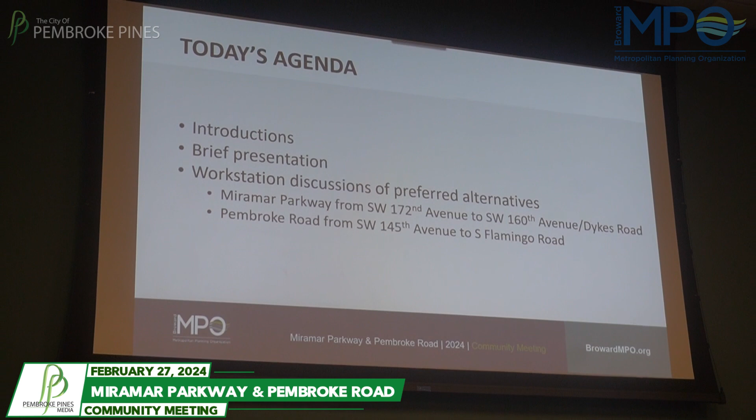Could you wait till Commissioner Castillo is coming in right now? Oh, it's coming right now? Okay. All right, are they here? Yes. Okay. Don't know if a representative from Pembroke Pines or Miramar would like to come up and say a few words if you'd like. If not, that would be great too. Or, this is your show. Let the healing begin. Okay, sounds good.

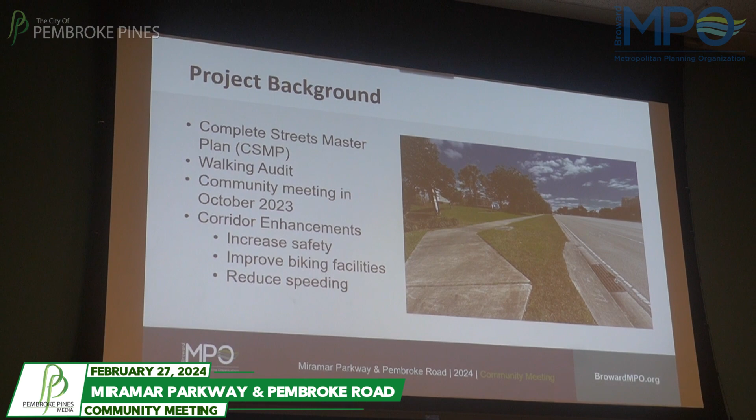A bit of background about the project. It really came from the Complete Streets Master Plan that the Broward MPO put together about 4 or 5 years ago. This project became a priority within that plan. We had a walking audit in 2023 where our project team, including many of you, walked the entire length of both corridors, gathered a lot of data and other information.

We had a meeting back in October. We got a lot of good feedback. With that feedback, we heard a few priorities from the public. We heard you wanted a safe, protected, separate bike lane on Miramar Parkway and Pembroke Road. You definitely wanted that to be a priority. We heard you, and tried to include that in the modified alternative you have before you today. Overall, you wanted both corridors to be safer, operate better, have slower traffic, and we tried to provide that as well.

I'm going to hand it off to Stuart. He'll take you through the details of both projects. Thank you, Mark. So my name is Stuart, I'm with Kimley Horn and Associates. We're the consultant team supporting the Broward MPO, as well as the cities of Pembroke Pines and Miramar on this project, which comes from the Complete Streets Master Plan that the MPO Governing Board adopted in 2019.

So there are 2 corridors packaged together as part of this project for funding through the Complete Streets Master Plan, which is a priority of the Broward MPO's Metropolitan Transportation Plan. As we have 2 corridors, I'm going to go through the Miramar Parkway corridor first. It's shown on the right side as you're looking at me. If you're in the audience, look on your right side, Miramar Parkway. That's the boards and the map that you see on your right.

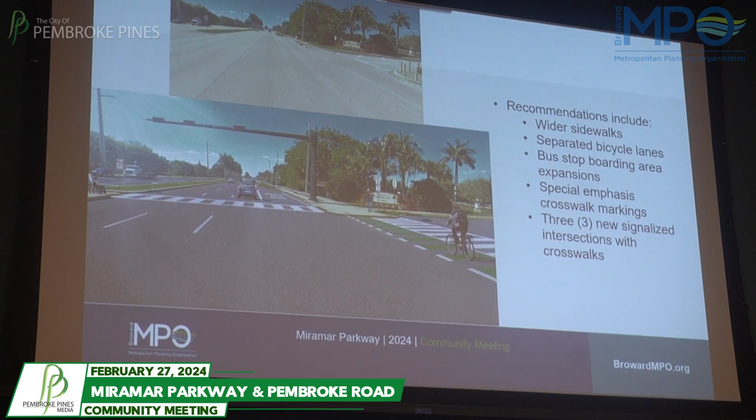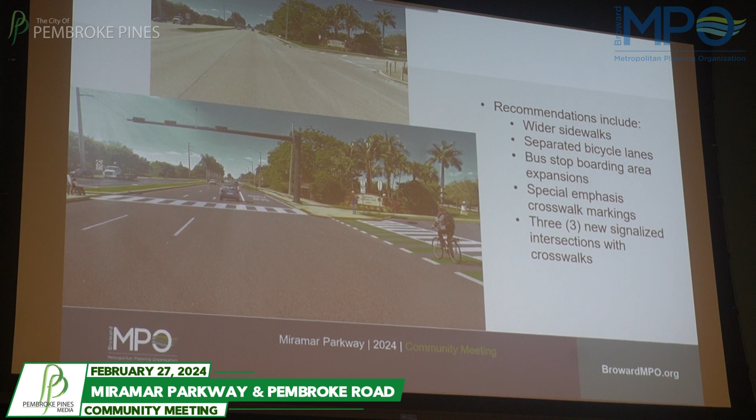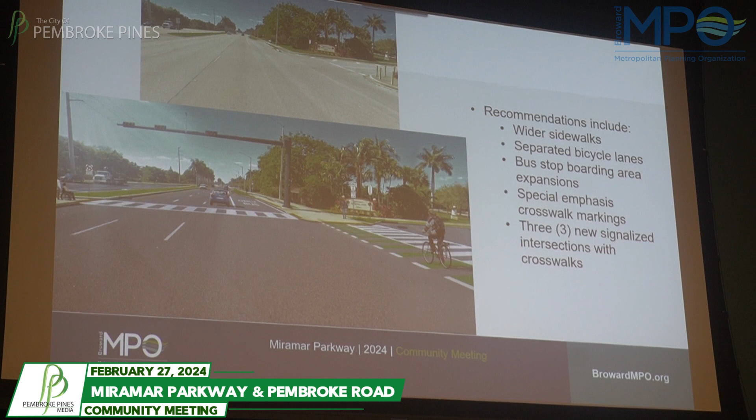The recommendations we've made, based on our field assessment, our technical analysis, and the community input we received back in October when we had a public meeting just like this at Miramar Police Department, include implementing wider sidewalks on Miramar Parkway, and separated bicycle lanes, taking the bicycle lanes we have, which are currently on road, and moving them up on the curb, basically separated from roadway traffic, adjacent to pedestrians on the sidewalk. We're also recommending bus stop boarding area expansions so we have more room for accommodating bus passengers boarding and alighting from the bus stops. We're recommending special emphasis crosswalks at all signalized intersections and 3 new signalized intersections with special emphasis crosswalks along the corridor.

The renderings on the left of this slide: the image on top shows an existing photo of the intersection of Miramar Parkway and the Miramar Regional Park. The image on the bottom portrays what it would be in the future, with a traffic signal added, bicycle lanes protected from traffic, and crosswalks at this location.

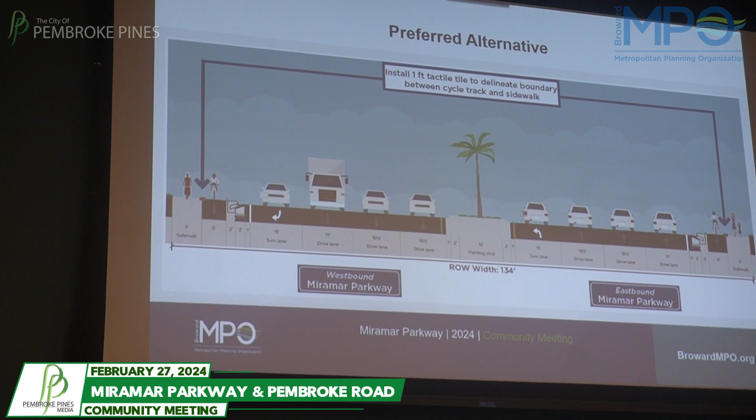So on the boards we have around the room for Miramar Parkway, that's going to be on your right as you're in the audience looking at me. We have different sections that show you the proposed design for each of the corridors.

For Miramar Parkway, we are proposing to maintain all of the existing travel lanes. There's 3 lanes in each direction today, and there will be 3 lanes in each direction in the future. The bicycle lane is being moved to be on the curb, adjacent to the sidewalk, rather than adjacent to the roadway like it is today.

In order to accomplish this, we're proposing to reconstruct the drainage of the roadway. So the curbs will have to move inward so that we can accommodate the bicycle lane adjacent to the sidewalk rather than adjacent to the roadway.

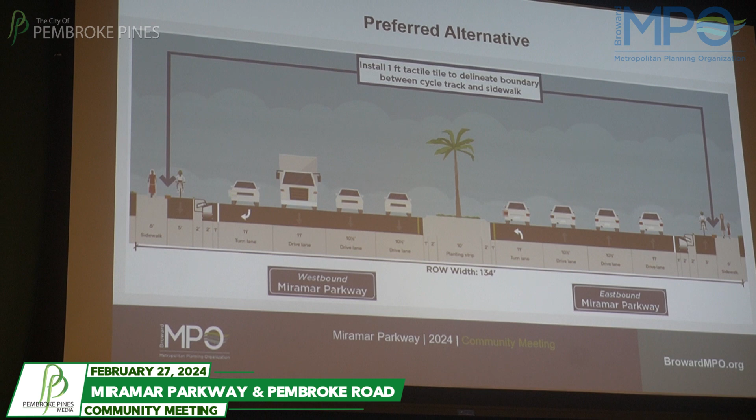We also have a map that shows how this would look from an aerial photograph. That's the long map on the table to your right. It shows an entire design from 172nd Avenue in the west all the way to Dykes Road, or 160th Avenue, in the east. It also shows the locations of the new signals we're proposing.

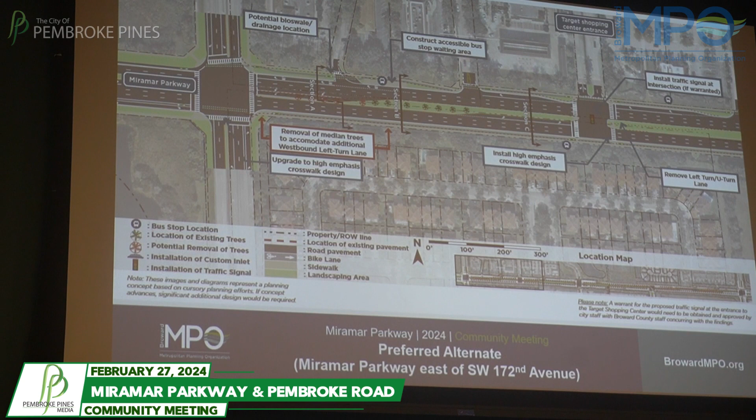One new signal is at the Target Shopping Center entrance. This is a very busy intersection. It's currently a median opening where people move outward from the Target Shopping Center and access 172nd Avenue from Miramar Parkway. It also shows the medians that are to be maintained and one additional turn lane westbound on Miramar Parkway at 172nd Avenue, taking that intersection from one left turn lane to two left turn lanes.

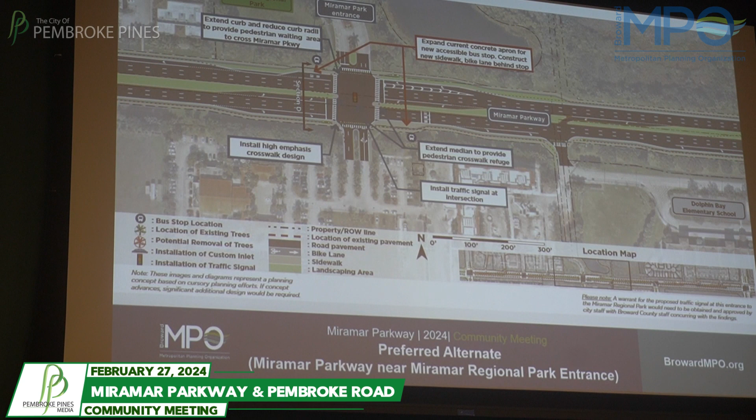Moving along the corridor, you see the intersection at Miramar Regional Park. This is a location where we're also proposing a new signal, which would allow for signalized access to the park as well as to the uses on the south side of the road. At 164th Avenue, a proposed signalized intersection with a crosswalk would facilitate access to Dolphin Bay Elementary School.

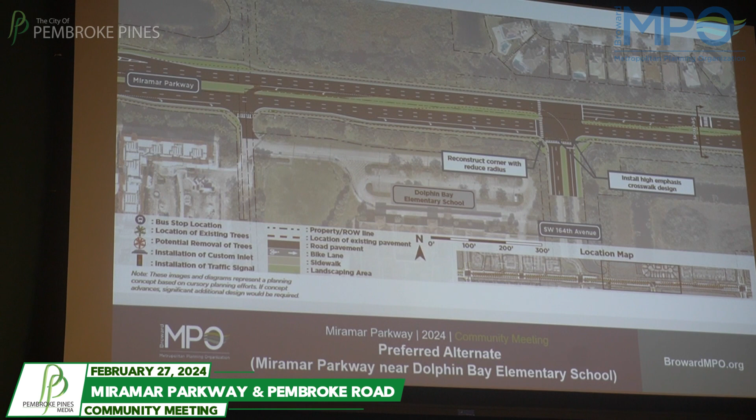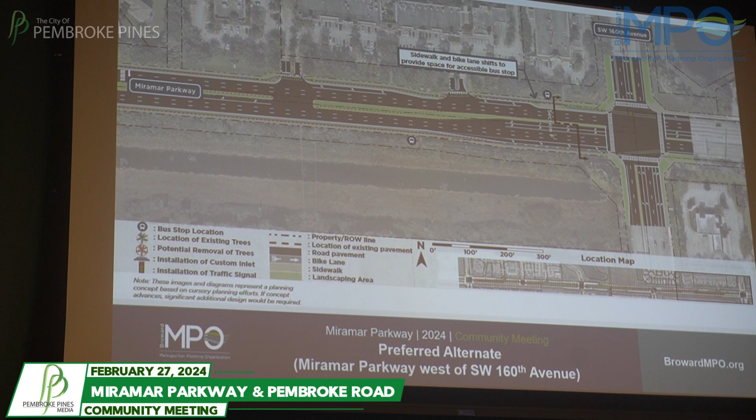This is the easternmost part of the map on Miramar Parkway. It shows the intersection at 160th Avenue. This is where the design would then tie into the existing typical section east of 160th Avenue.

The second of the two corridors is Pembroke Road. The study area we have identified is from 145th Avenue to Flamingo Road, so this study area is east of I-75.

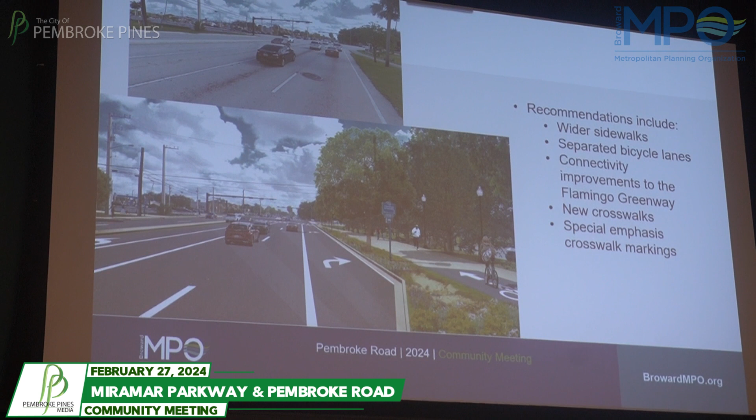The recommendations in this area include widening the sidewalks, providing separated bicycle lanes, providing connectivity improvements to the proposed Flamingo Greenway, and providing new crosswalks at intersections that don't currently have them, along with special emphasis crosswalk markings at those locations.

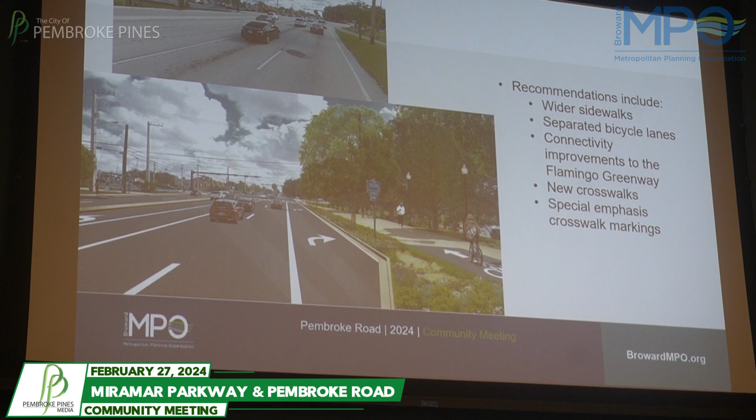The alternative we are recommending for this corridor includes separated bicycle lanes. So rather than having bicycle lanes adjacent to the roadway, we're putting those bicycle lanes adjacent to the sidewalk through a design with a horizontal separator between the bicycle lane and the sidewalk, while maintaining both travel lanes, 2 eastbound and 2 westbound, as well as all turn lanes that currently exist. There's also a proposed additional eastbound right turn lane at Flamingo Road.

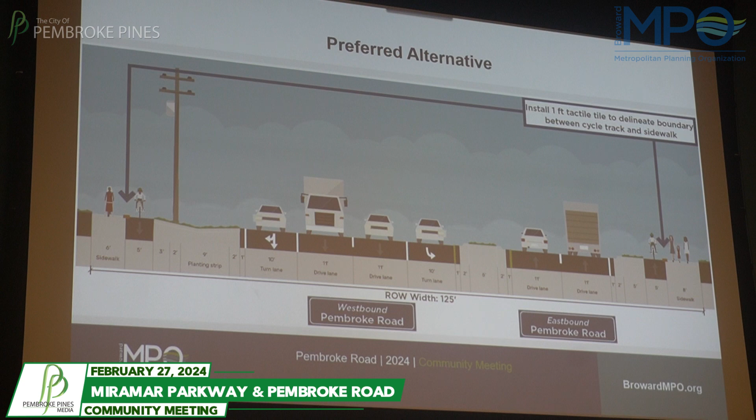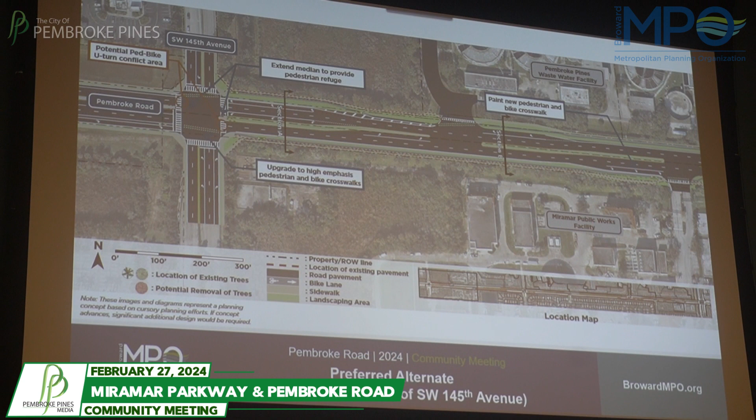The map on your left, as you're looking at me, shows the layout of this proposed design on Pembroke Road from 145th Avenue to Flamingo Road. It includes the separated bicycle lanes on both sides, and upgrading the crosswalks at each signalized intersection to high emphasis markings, meaning these are more visible to motorists.

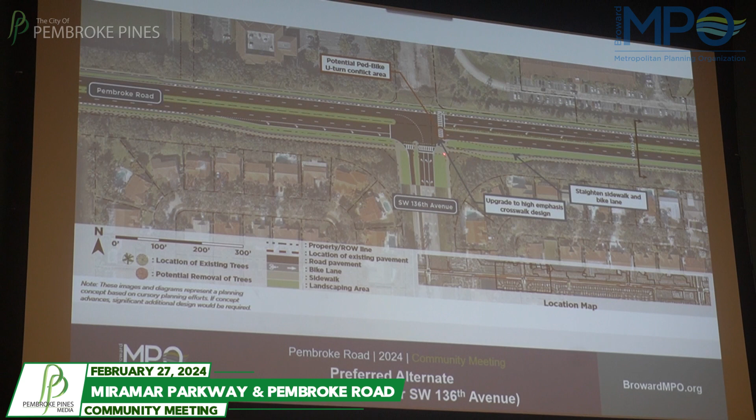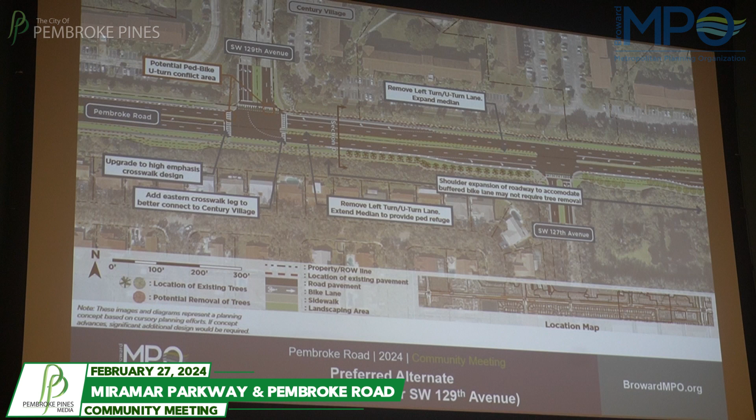In this area, at 136th Avenue, there's a signalized intersection with upgraded pedestrian crosswalk markings. At 129th Avenue, proposed crosswalk markings and signals on both sides. And at Flamingo Road, the connection to the Flamingo Greenway, which is part of the Broward County Greenways Master Plan and an important project for the city of Pembroke Pines as well.

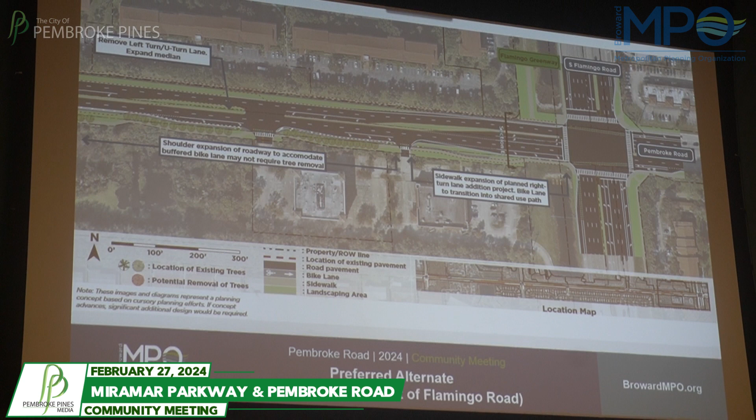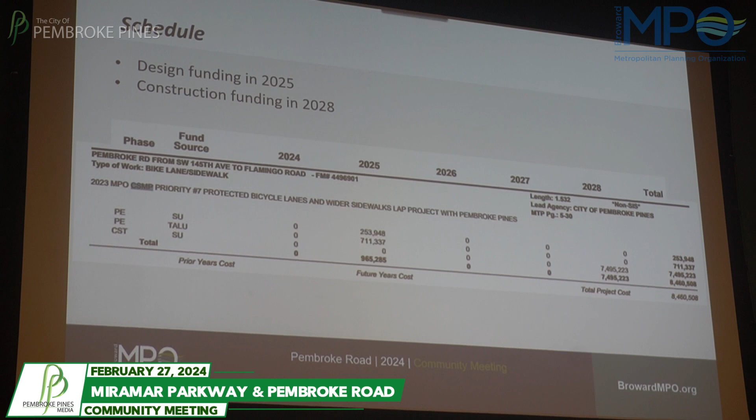So that is a preview of the design. Once we finish the formal presentation and take questions and answers, we want to have more focused conversations with you about each one of the corridors, whichever one you're most interested in, where we can take your feedback on the design. We'll have project representatives at each one.

Pembroke Road, again, is on your left if you're sitting in the audience looking at me. Miramar Parkway is on your right. I'm going to pass back to Mark, who's going to finish the presentation. We'll take questions and answers in a formal group setting, and then we will disperse to the two different corridors to continue the conversation in a more conversational way on each one.

All right, thank you, Stuart. Luckily, we do have funding allocated for Pembroke Road. We have design funding allocated in 2025, and we have construction funding available in 2028. That will definitely help speed up the project.

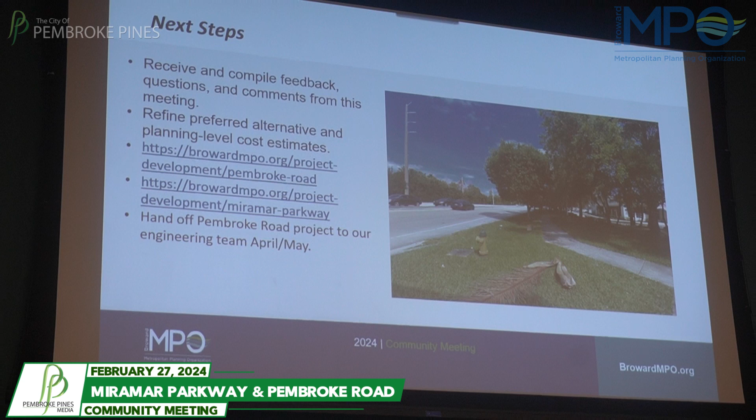We want to hear everything. We'll be compiling it, incorporating your comments into the plan, modifying it, and refining the preferred alternative.

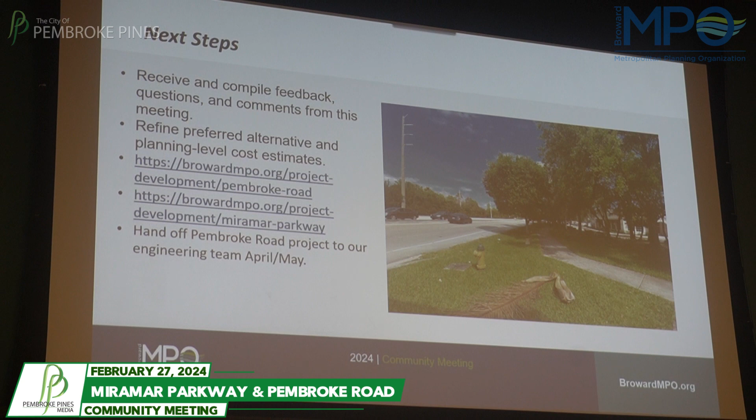Our goal would be to hand off the Pembroke Road project in April or May. We'll be handing it off to our engineering team, where they'll work on the project in more detail and get it ready for construction by 2028. With that, we'll do a quick Q&A, and then we'll do a breakout where we'll get your feedback. Thank you.

Yes, so there's the Pembroke Road to US 27 project, which is being done in 3 phases. Phase 1 is supposed to begin in October of 2024. That one, I believe, is between Dykes and 172nd, and then the next phase goes to like 196th, and then the last phase goes out, as I understand it, roughly speaking. So how does this... you're talking about 2028. Shouldn't all this work be done at once? How does this play into that extension of Pembroke Road, widening it and taking it all the way to US 27?

Yeah, I mean, our goal would be to coordinate with that project. I don't know if you know more about it. Yeah Mark, I think this is a separate effort from the extension of Pembroke Road to US 27. So they're gonna do Pembroke Road first, and then you guys are gonna come in and do it again? Well, this is a separate section than the extension to US 27.